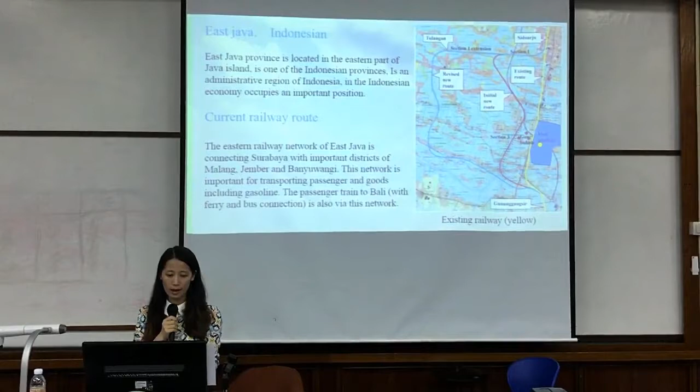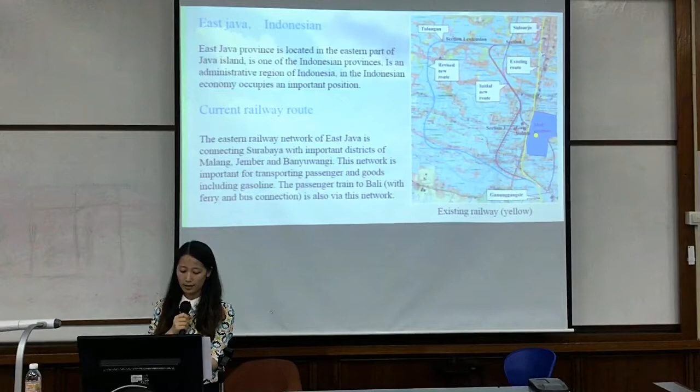East Java province is located in the eastern part of Java Island. It's one of Indonesia's provinces, an administrative region of Indonesia, and occupies an important position in the Indonesian economy. Its provincial capital is Surabaya, Indonesia's second largest city. The strategic location of East Java has made it the center of domestic and international trade in eastern Indonesia.

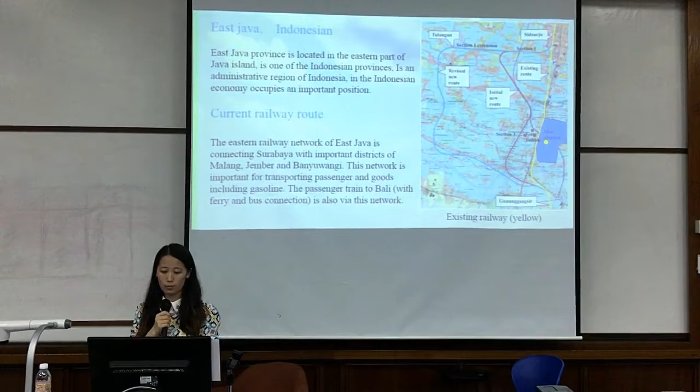Next is the current railway route. The Eastern Railway network of East Java connects Surabaya with important districts of Malang, Jember, and Banyuwangi. This network is important for transporting passengers and goods, including gasoline. The passenger train to Bali is also via this network.

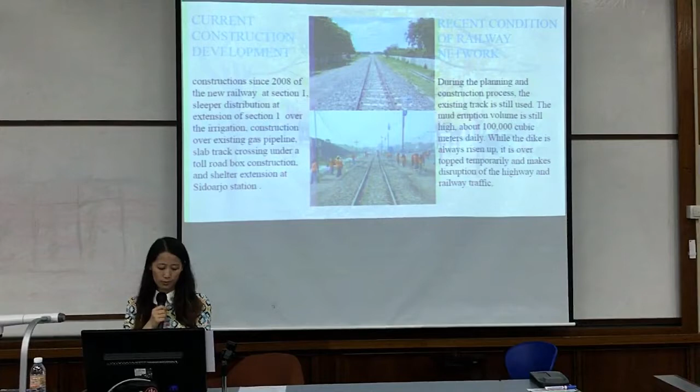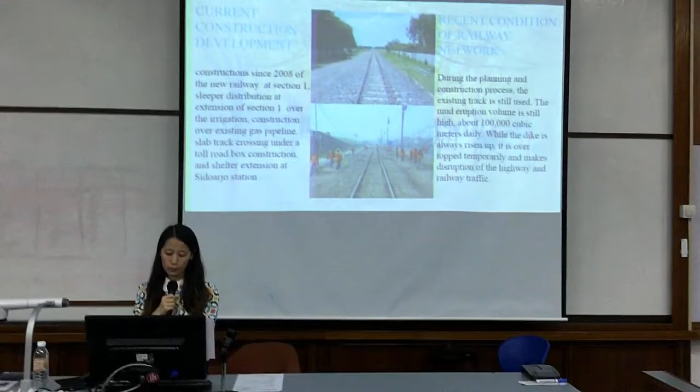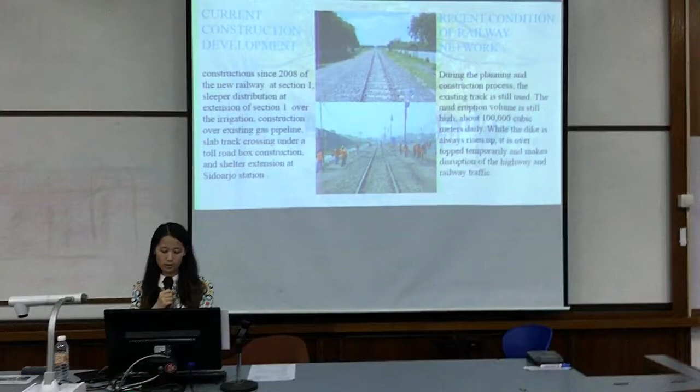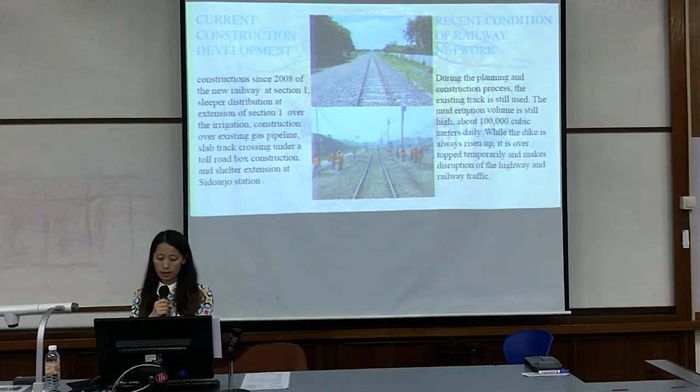Next is current construction development. While the route is revised, Section 1 remains the same, and the extension of Section 1 is using the right of way of the existing defunct railway, neglecting the difficulties of land acquisition problems. This condition gives weight to the construction since 2008 of the new railway at Section 1. Sleeper distribution at the extension of Section 1 over irrigation construction over existing gas pipeline, slab track crossing under road box construction, and a shelter extension at the Sidoarjo station.

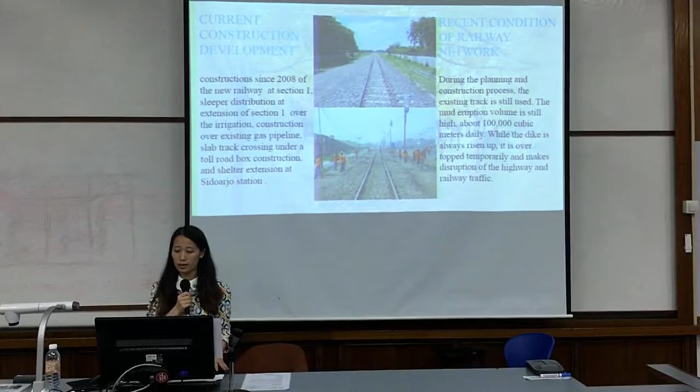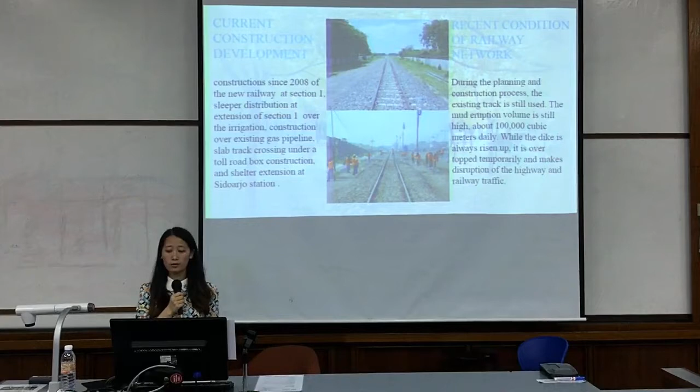The next one is the recent condition of the railway network. During the planning and construction process, the existing track is still used. The mud eruption volume is still high, about 100,000 cubic meters daily. While the dike is always risen up, it is overtopped temporarily, causing disruption of highway and railway traffic.

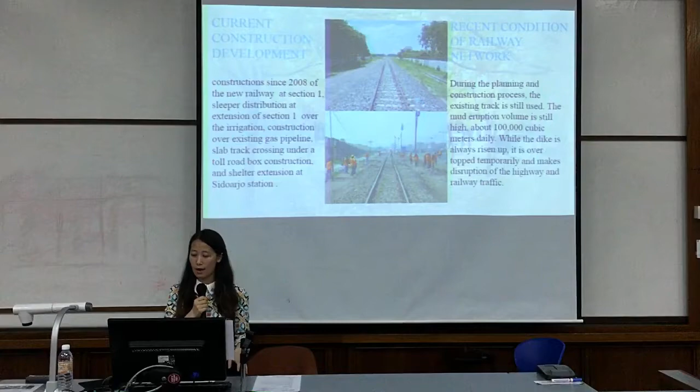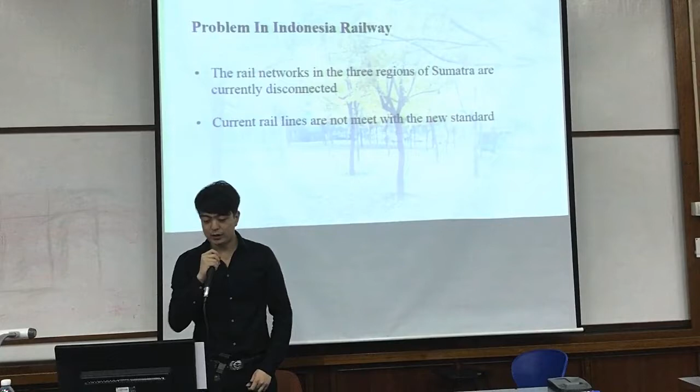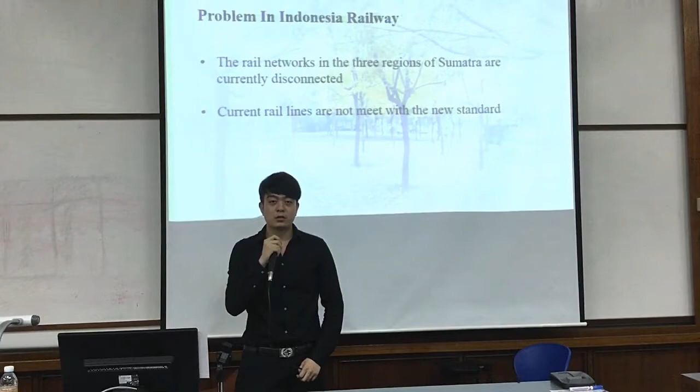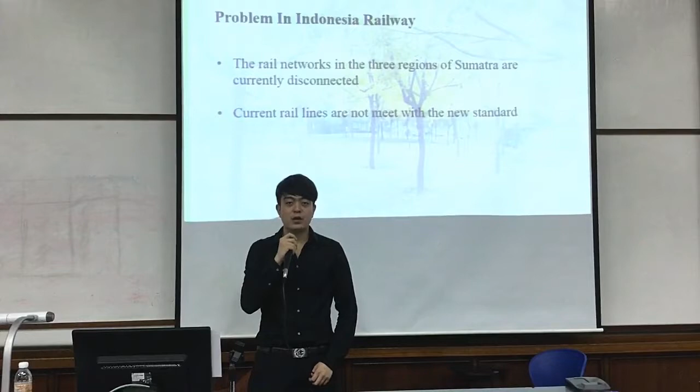Now I'm going to talk about problems in the Indonesian railway. The first point is the rail network in the three regions of Sumatra are currently disconnected, and there is a lack of connectivity. This lack of connection means failure to meet the needs of intensive passenger and freight transport.

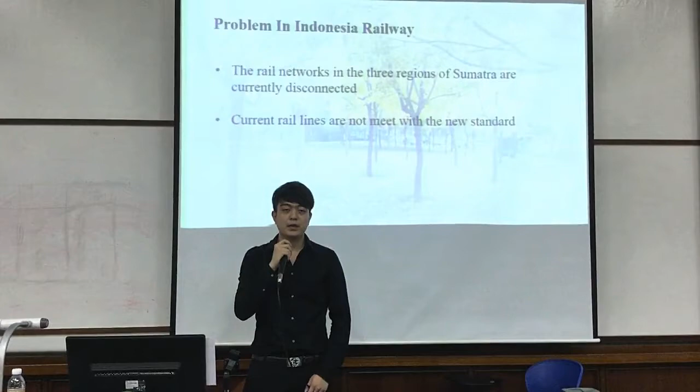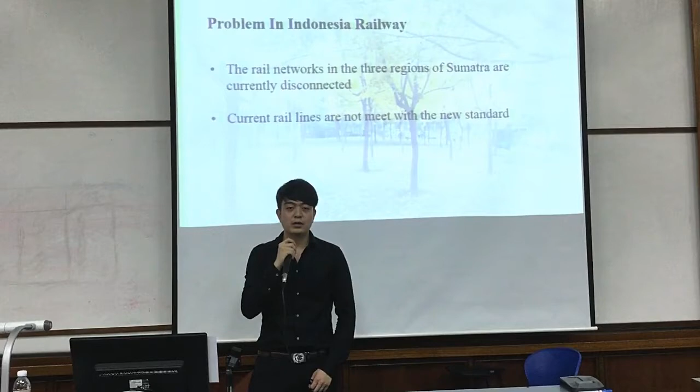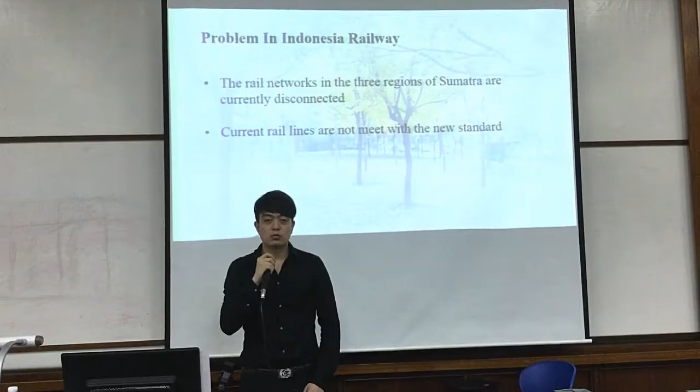In addition, for freight transport, the current system in Sumatra does not adequately service the energy development in the coal and plantation sectors. The rail network exists on only two islands in Indonesia, Sumatra and Java, with no national railway presence in other islands.

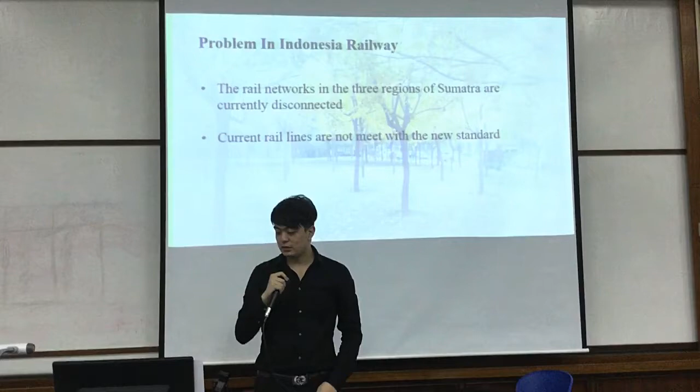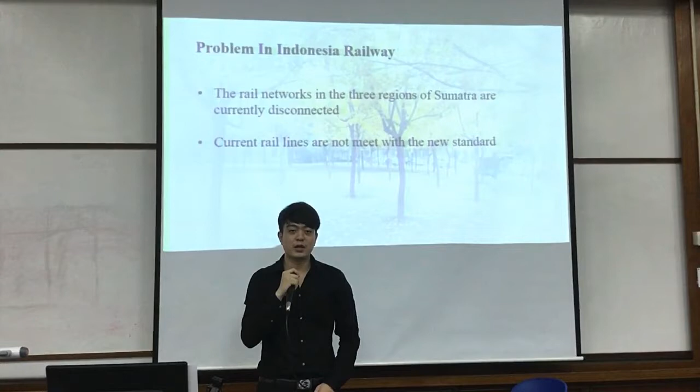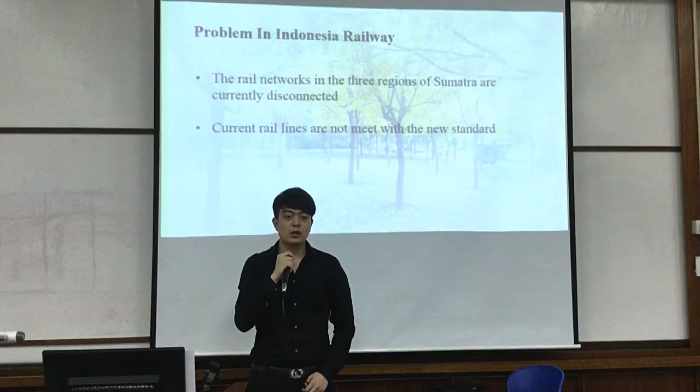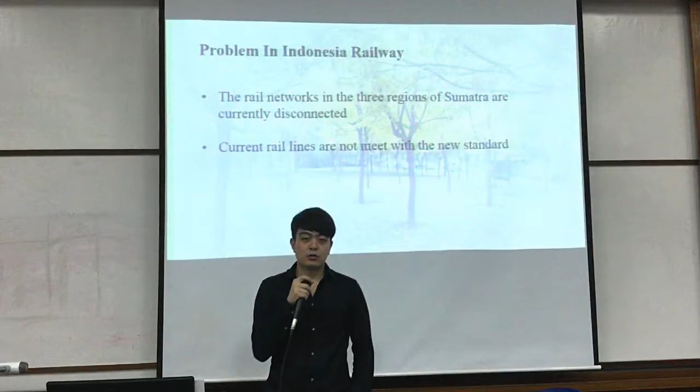Also, current rail weights are not up to the new standard. In Indonesia, the relatively light standard limits the use of more powerful locomotives, as well as limits the capacities of both freight and passenger transport. The current low limits do not permit the use of heavier locomotives with sufficient power to pull passenger trains at higher speed. The greater inefficiency of lower rail weight and track modulus means higher wear rate and therefore higher maintenance cost.

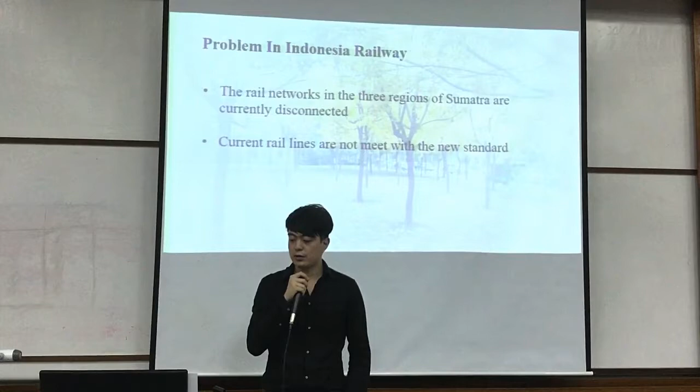The reasons to establish this in East Java: the first is to improve economic growth, the second is to improve the tourism sector, and the last is to promote inter-regional exchange. This is my part; my friend will continue his part.

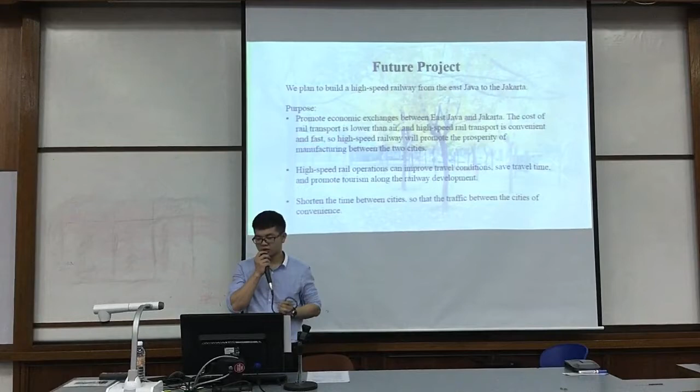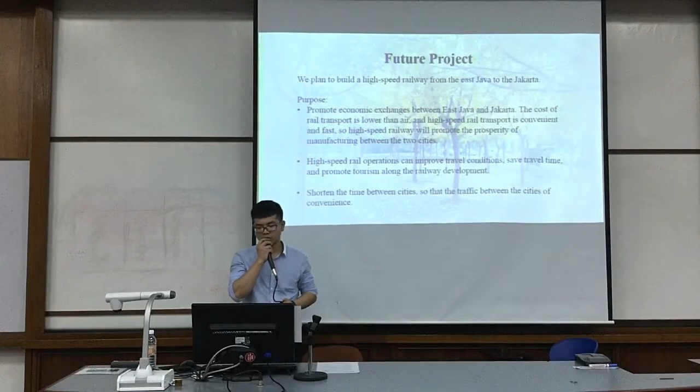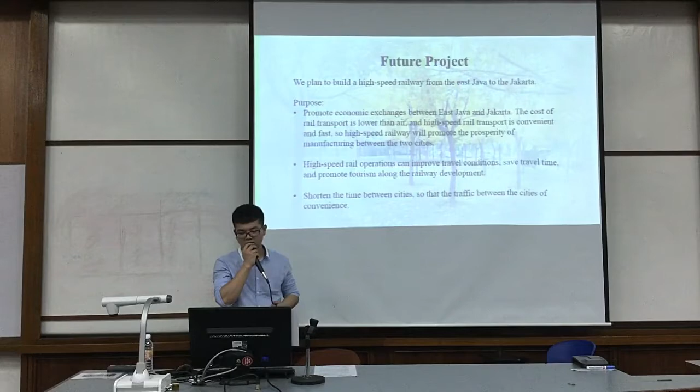The future project we plan is to build a high-speed railway from East Java to Jakarta. Our purpose is to promote economic exchange between East Java and Jakarta. The cost of rail transport is lower than air, and high-speed rail transport is convenient and fast. So high-speed railway will promote the prosperity of manufacturing between the two cities. High-speed rail operations can improve travel conditions and travel time, promote tourism along the railway development, and shorten the time between cities so that traffic between the cities is more convenient.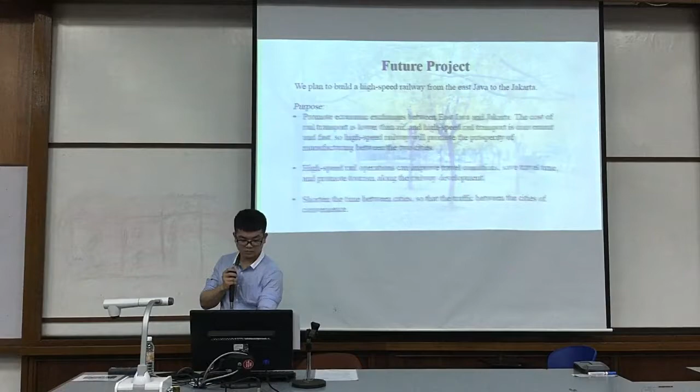The first stage is necessity and feasibility study. Our route is from East Java to Jakarta. First, East Java's existing railway system is old, mostly ordinary trains with older technology and facilities, which will hinder service and increase risk to passengers. For example, the railway system's course of operation, because it is old, will have some security risk and cannot protect the safety of passengers.

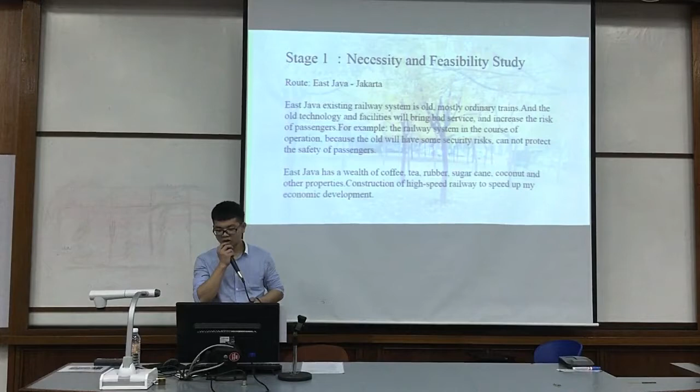East Java has a wealth of coffee, tea, rubber, sugar cane, coconut, and other products. Construction of the high-speed railway will speed up economic development.

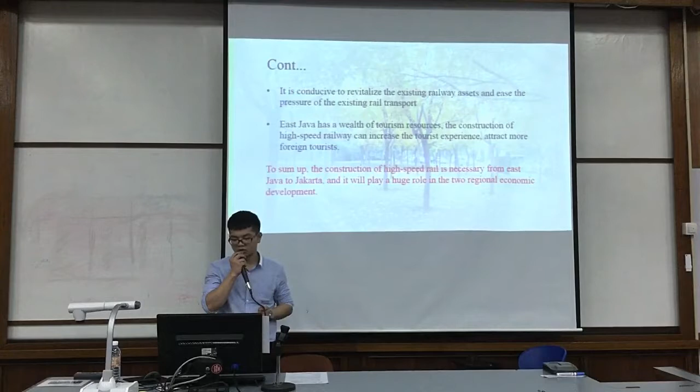The next point is it is conducive to revitalizing existing railway assets and easing the pressure of existing rail transport. Last, East Java has a wealth of tourism resources, and the construction of high-speed railway can bring tourists to more remote areas. So to sum up, the construction of high-speed rail is necessary from East Java to Jakarta, and it will play a large role in the two regions' economic development.

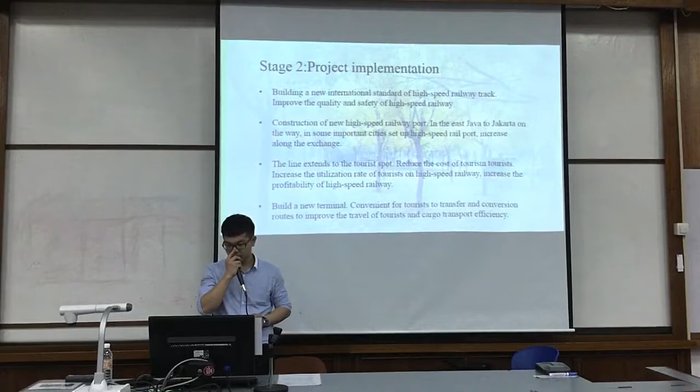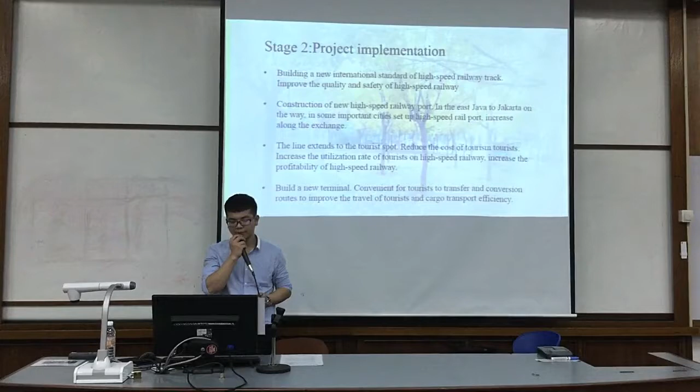The second stage is project implementation. First is building a new international standard high-speed railway track to improve the quality and safety of the high-speed railway. Second is construction of the new high-speed railway port from East Java to Jakarta. Along the way, important cities will have high-speed rail stops, increase along the exchange.

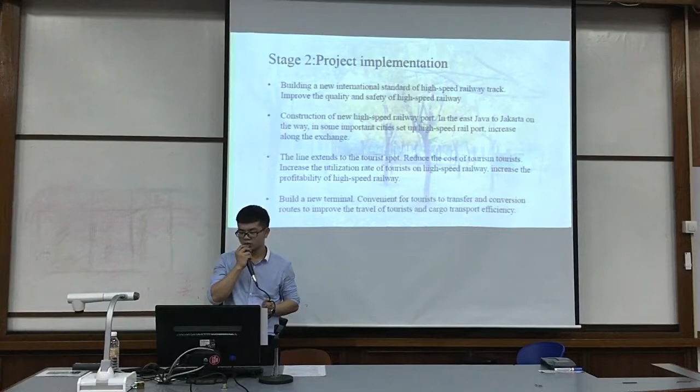Next is to extend to tourist spots, reducing the cost of tourism. This includes increasing the utilization rate of tourists on the high-speed railway and the profitability of the high-speed railway. Last is to build a new terminal combining transfer facilities for tourists and cargo transport to improve travel efficiency for tourists and cargo transport.

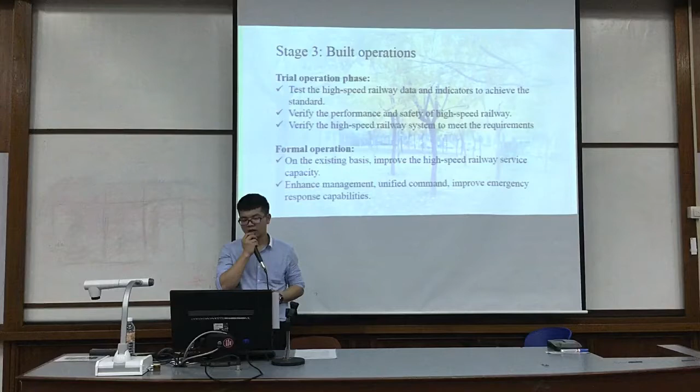Third stage is build operation. Trial operation phase includes testing high-speed railway data and indicators to achieve the standard, and verify the performance and safety of the high-speed railway, and verify that the system meets the requirements.

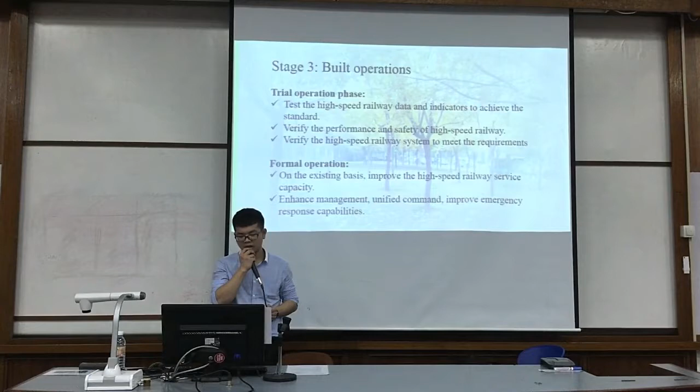For formal operations, this includes, on the existing basis, improving the high-speed railway service capacity, enhancing management, unified command, improving message and emergency response capabilities.

Management in the project: the first step we need to know is devegetation. If you want to build the rail from the beginning, you need to establish the rail area first. And if you want to establish it from an old rail, you need to clean up the rails from wild trees and other wildlife around there, and relocate them to other places.

The second step is designing processes and advanced works. We have to come up with a design of the process from one road to another, for how long, and also what type of rails we need to determine.

The next step is moving heaven and earth. After designing the track and the road, we need to look at the quality of the ground. If the ground quality is not good, we need to pick it up and change the ground to something suitable for the track before it is established.

The fourth step is the work on structures. After determining the ground quality is okay, we can build the new rail track on the determined road, starting with making the line, laying the steel line first, and then moving to the next process.

So all these processes are really necessary in order to establish a high quality railway, especially for a high-speed rail project. So yes, the cost of building the high-speed railway in East Java.

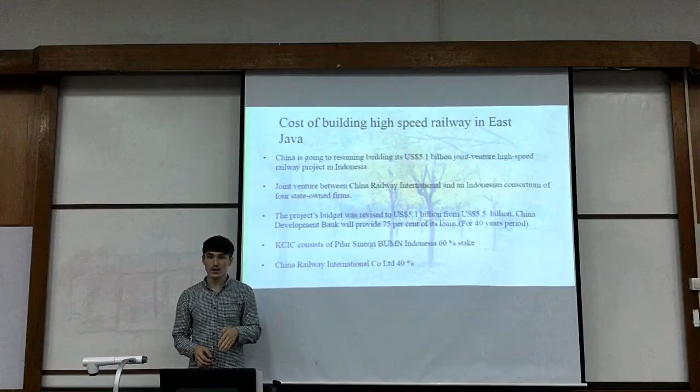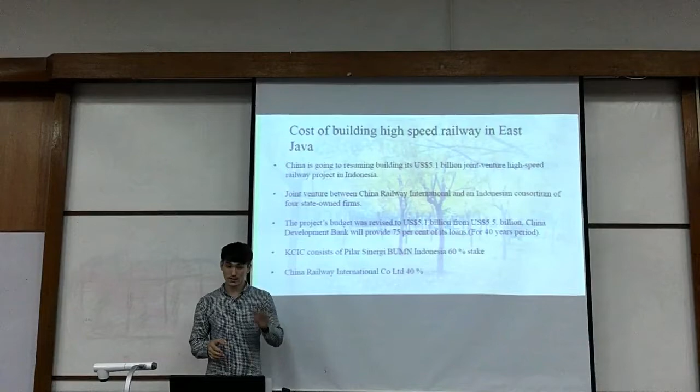China and Indonesia are going to do a joint venture, with China supporting Indonesia. The project approximately costs 5.1 billion, as a joint venture between China Railway International and an Indonesian consortium of four state-owned firms—meaning China is doing a joint venture with four companies in Indonesia.

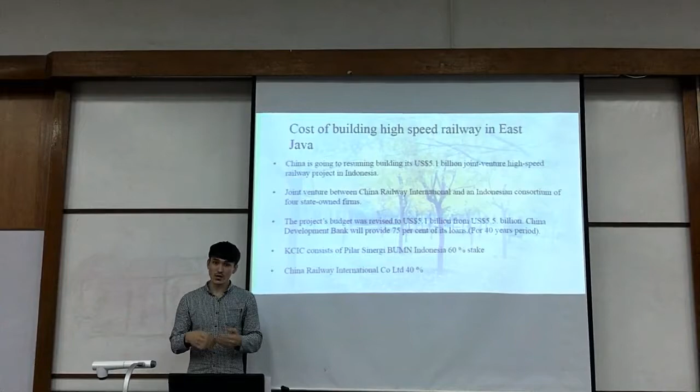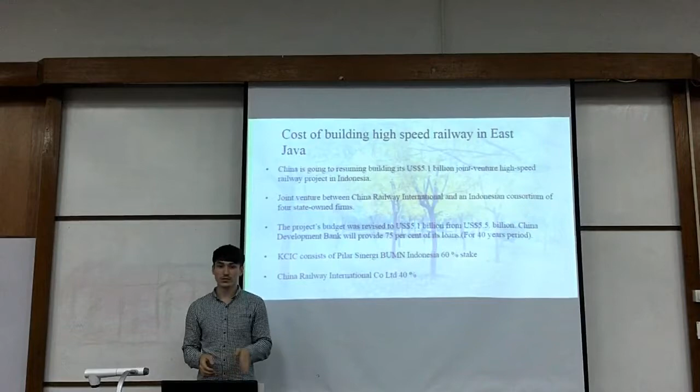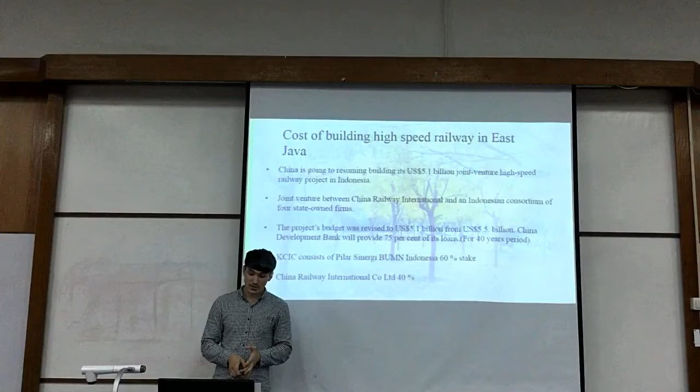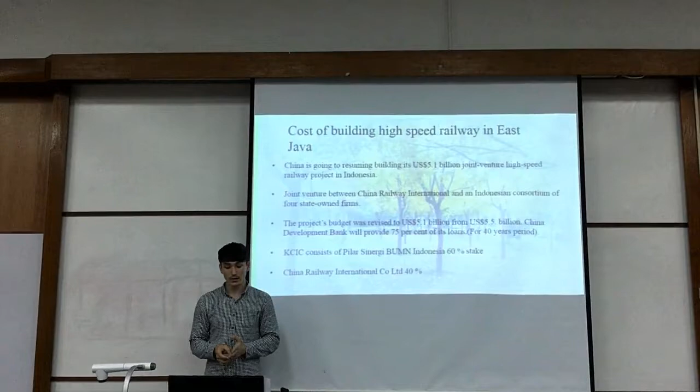The project budget was revised from 5.5 billion to 5.1 billion USD. China Development Bank is providing the facility, covering 75%. Indonesia is taking the loan from China with an agreement for a 40-year period. One Indonesian company called KCIC is responsible for 60% of this project, and China Railway International Co. Ltd is responsible for the remaining 40%.

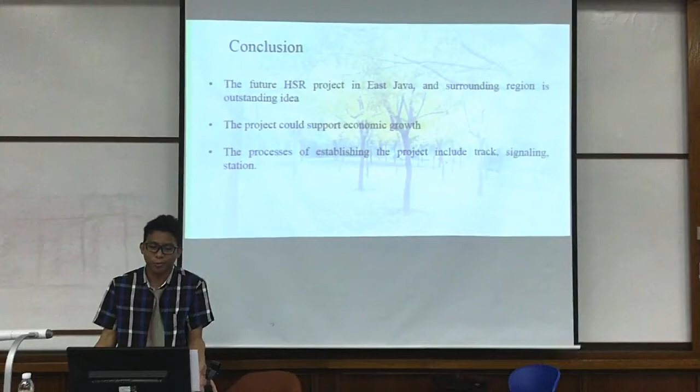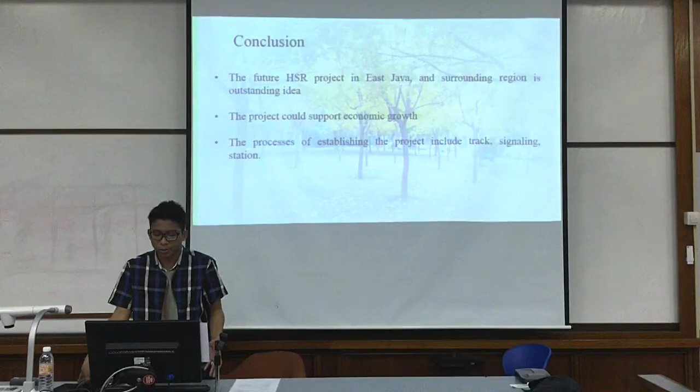In conclusion, the reason we need to establish the HSR project in East Java, Indonesia, is to support economic growth and improve the tourism sector, especially in the East Java region. The idea of the HSR project is outstanding because it has the potential to increase the GDP.

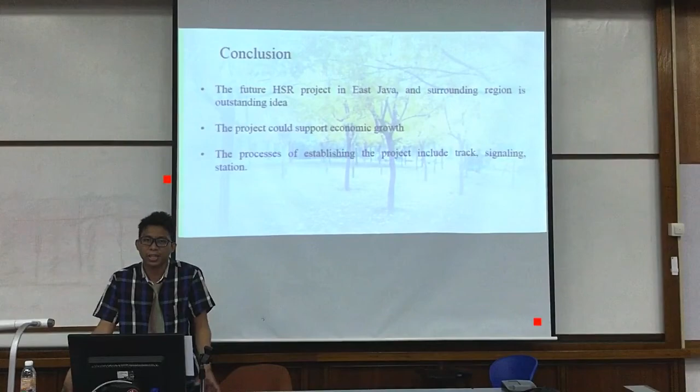Also, the process of establishing the project requires establishing the track, signaling, and the stations, as mentioned before. Okay, that's all from our group presentation. Thank you.